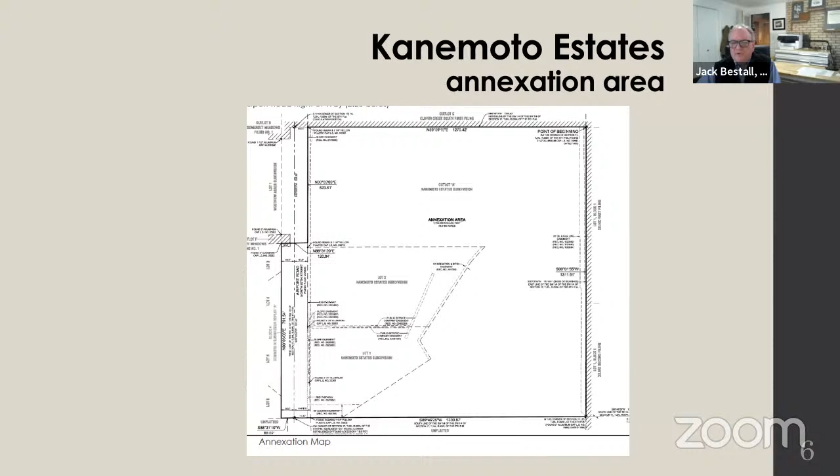We looked at this, and a couple of people already have asked why we're doing this. It really relates strongly to our valuation of the property, what the opportunity was, what it was being used for currently. We've been working in Longmont for the last few years, and I think we've started to see this as an opportunity to address community needs and goals. Yes, we're developers, but we also really like to do our work on properties where we can align with community policy wherever possible and address needs.

Right now, in the Envision Longmont plan and in discussions that are going on consistently, Longmont's really becoming a very diverse community. Age, income levels, and ethnicity play into that diversity. There's a real need to maintain and grow the economic base. The town has a limited area in which new development can grow, so really there's a lot of infill capability.

This is one of the vacant or less developed parcels that has the opportunity to achieve some of the Envision Longmont plan goals in terms of business, jobs, and revenue. It also will provide sustainable living opportunities. We're looking at energy conservation, home ownership, and social equity in terms of attainable housing. Really what's happening a lot right now in Longmont is that you can work here, but a lot of times people aren't able to live in Longmont.

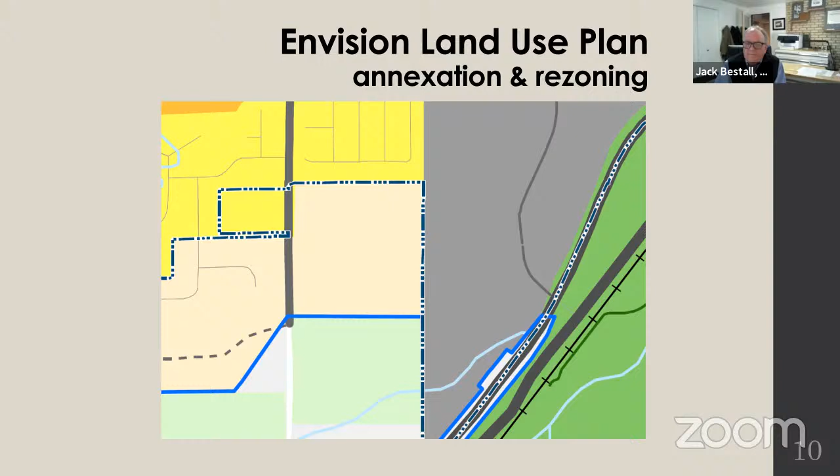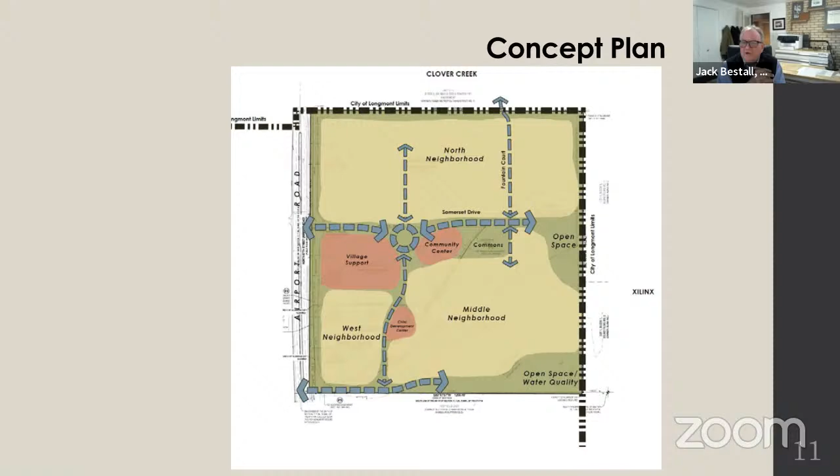We want to talk about that some more. We know that's a concern.

This shows the land use mix of different single family, paired, some fourplex cottages, and a limited number of apartments. These would be owned and some rental, as well as a general store on the childhood development.

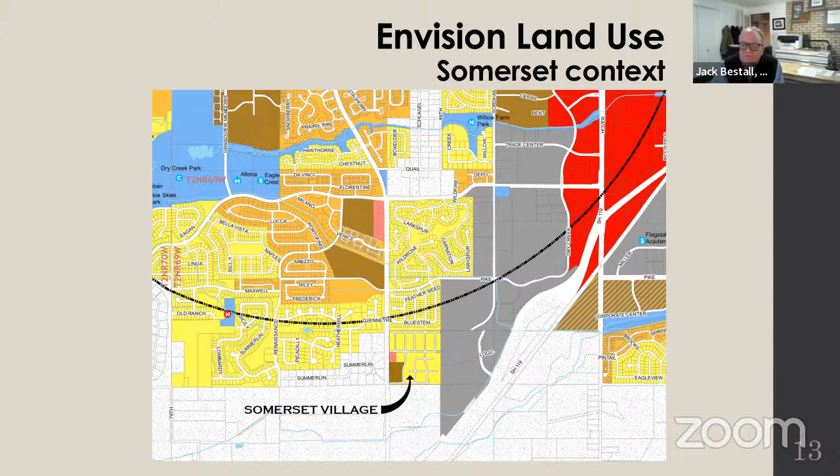The brown area along Airport Road on the southwest edge, those are fourplexes, for example. What we've tried to do is go with development that has a detached character throughout, and the densities are just over about 8 units to the acre gross.

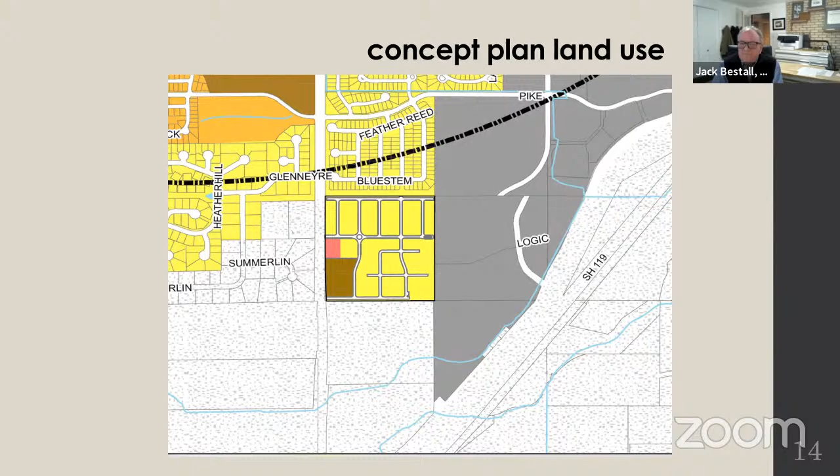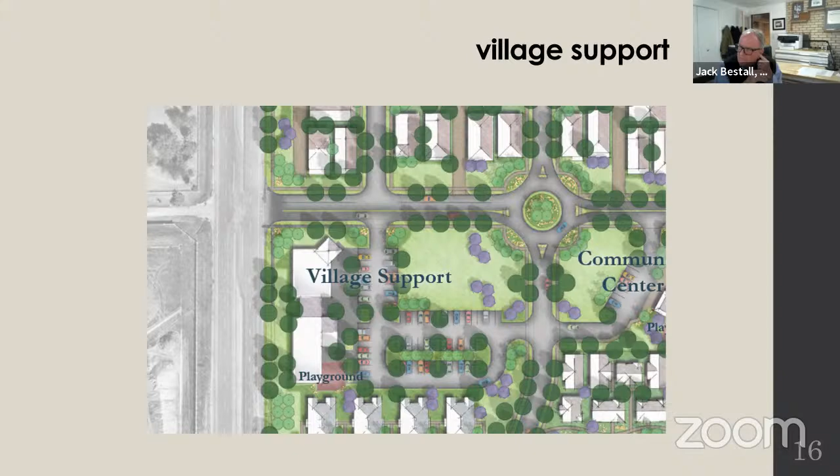The village support, this is really an area for childcare and a general store. When we have a commercial color, that's basically what's here. It also is really an opportunity to be a hub for the community.

The scale and character of the buildings, the general store there on the right side.

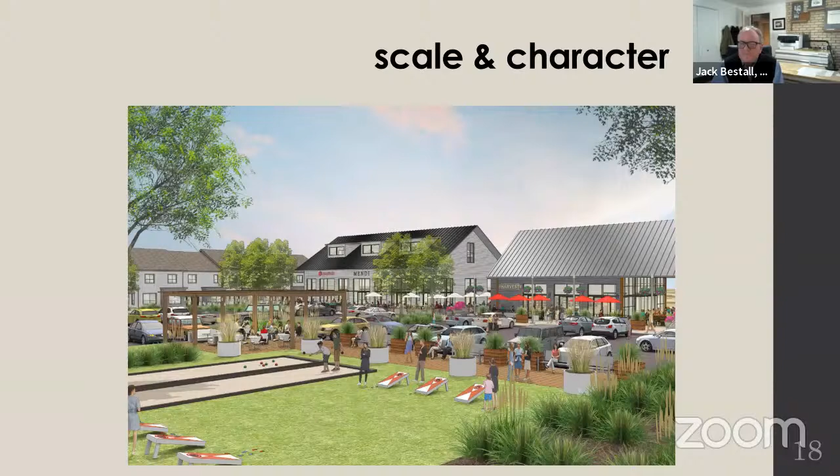The community center is in the center actually of the village.

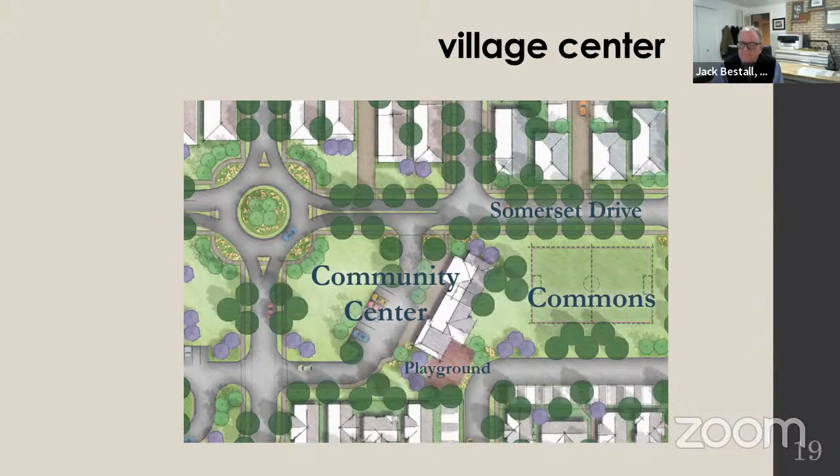Character of that, it's really a focus for recreation and gathering for this neighborhood.

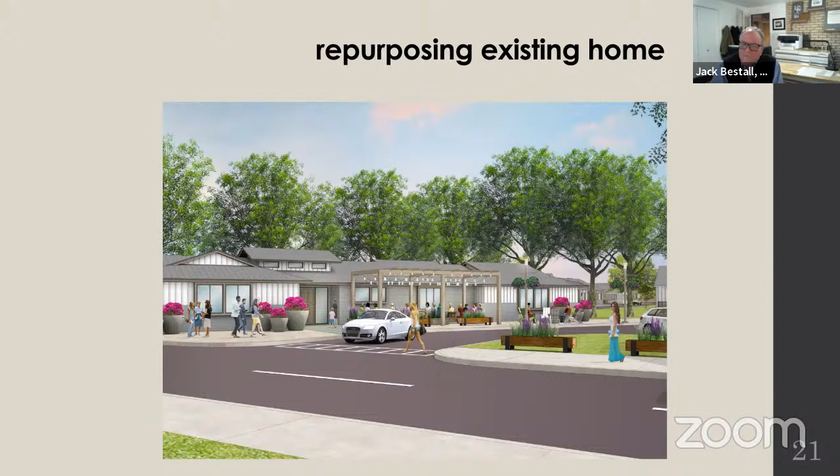This is a repurposing of the existing home, which was the Kanemoto parents' home. We've just looked at it and we think we can repurpose this. But the main point, I guess, is that this will carry forward the concept that we do want a community center. And this might well be a good location to be able to house that.

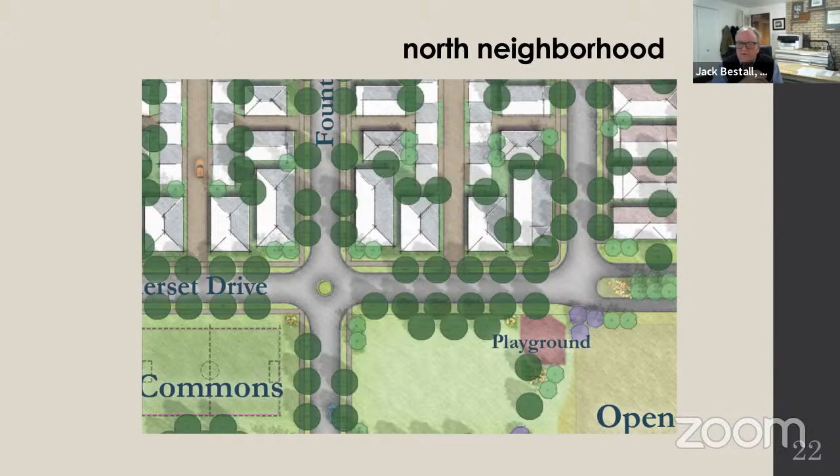The north neighborhood is alley served, so all of the garages are on the rear of the lots, and then there are streets fronting the houses. Some have shared driveways. It's a combination of single family detached homes with shared garages on the alley side, adjoining the playground and so forth.

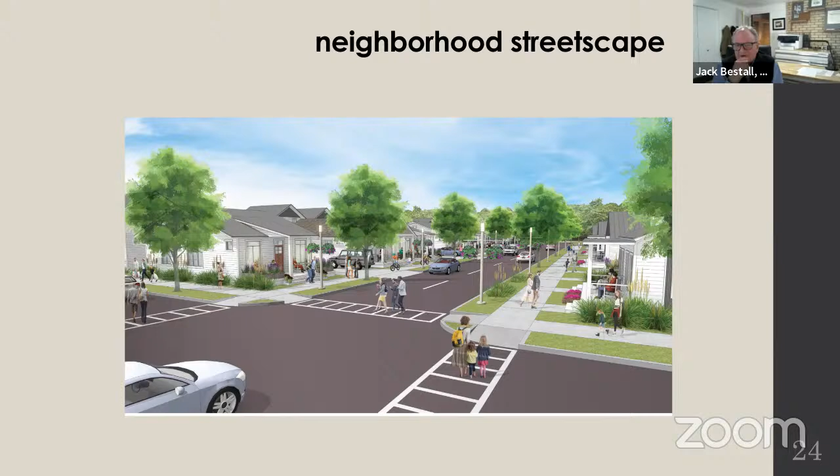This is a view of the streetscape, tree lawns along the frontages, porches, and the garages with some second level ADUs you can see on the left side.

The middle neighborhood has cottages with 1, 2, and 3 bedroom units.

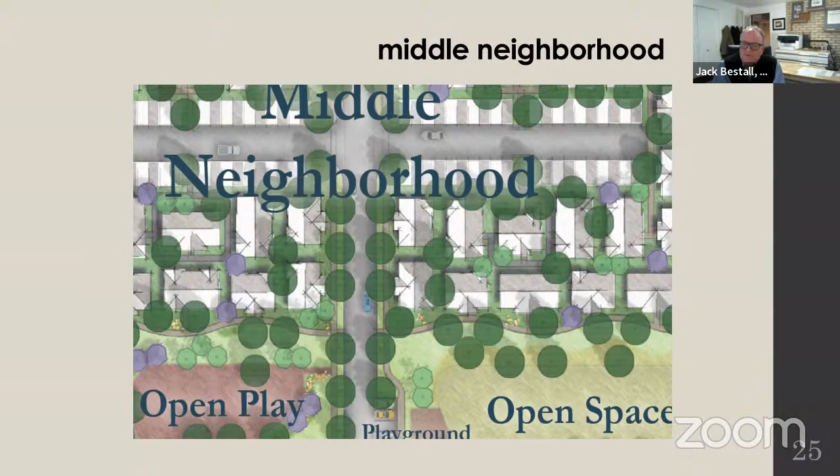These are clustered with activity centers and open space throughout the cottages itself.

This is a view of one of the play fields with the cottages in the background there and a gathering spot over to the left, to the east side there.

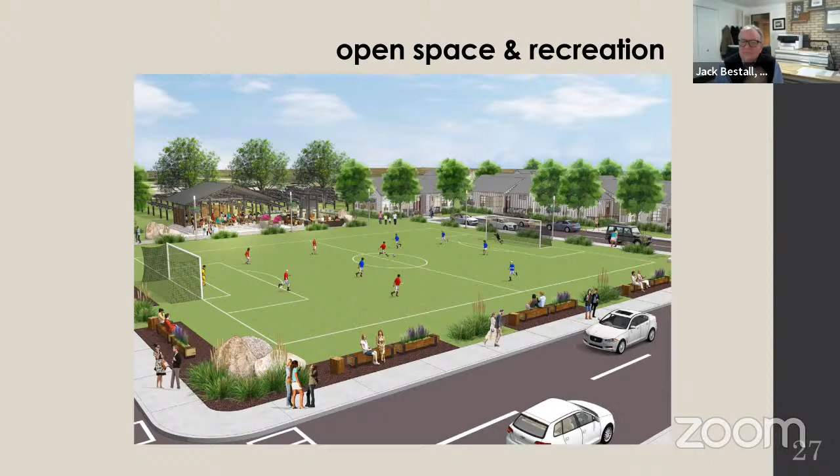The Children's Center concept is being carried forward with the repurposing of the second home that was there existing. It's abutting the fourplexes there. You can see to the west, and the cottages on the right or the east side.

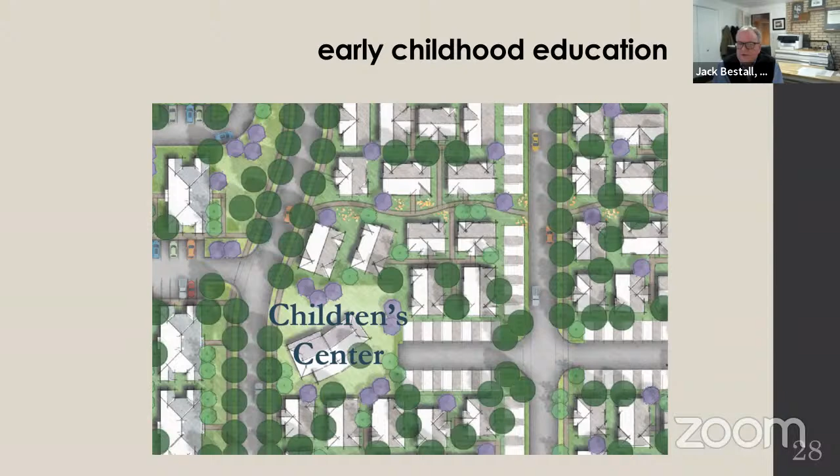We see this as a real opportunity. There's some excellent early childhood development centers in Longmont now. We've had some very preliminary talks with them to get some of their ideas, but we think this is very important for sustainability. It's an aspect that often goes unnoticed, and we're looking at this to see if we can integrate this into the program for the project.

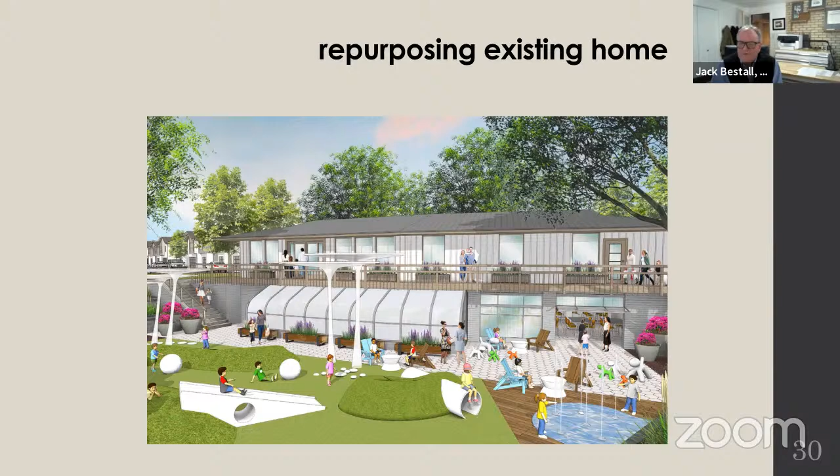But I think there's other ways to maybe go about this, and we're cognizant of the concern about introducing traffic both into Clover Creek, but also Clover Creek traffic being introduced into Somerset. There's a trade-off there, and I think that's something we really want to work on with residents of Clover Creek.

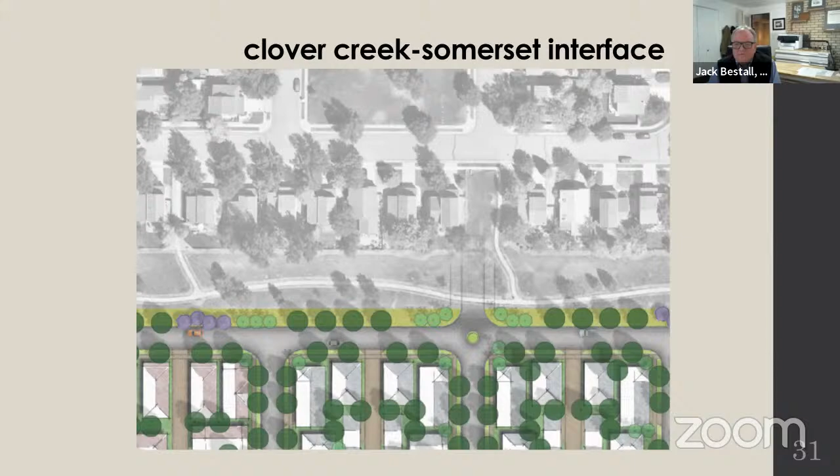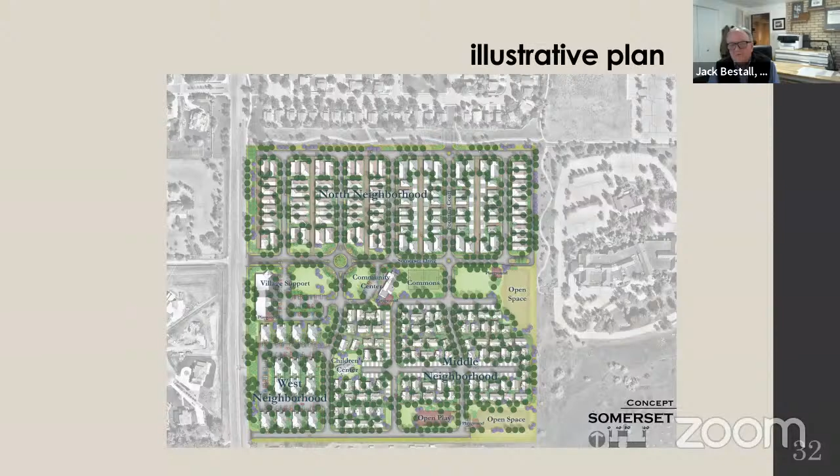Next. So that's the illustrative plan, and that's the concept that we're launching with you, and we are looking forward to getting your comments. Next.

In our effort to see what the potential could be here, not just for development, but really to look and see, in terms of an agricultural easement, what could be done in terms of what the needs are for the adjacent community, the city of Longmont.

Go one more, I think. Next. So we appreciate the opportunity to present this to you and look forward to your comments. Thank you.